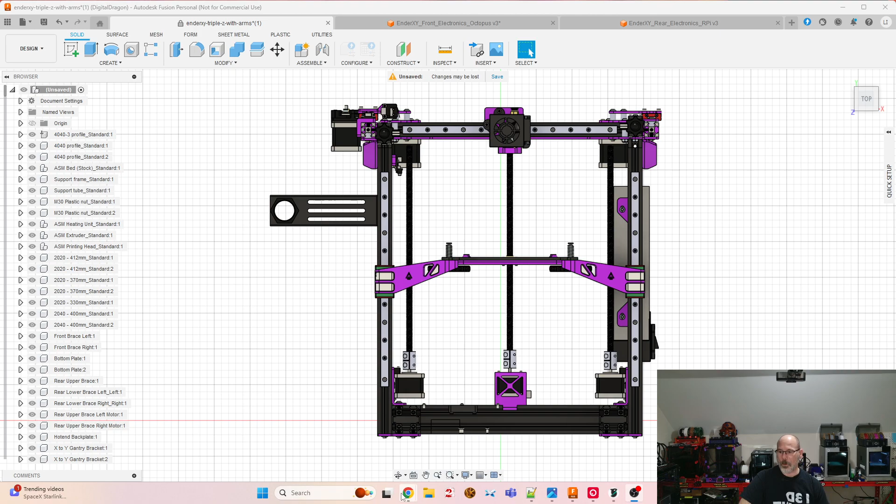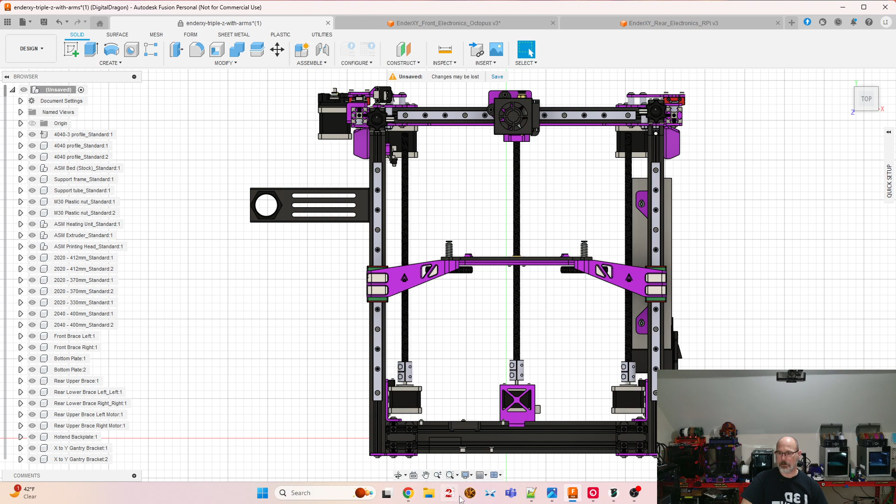So what we started doing was developing a box for the front that would hold the Big Tree Tech Octopus, right? So we did some measurements. We CADed this out.

We've got the mounting studs here for the Big Tree Tech Octopus, which is pretty nice because they're on a rectangle. It's not like one's offset or anything. And I decided to make a tunnel here, because remember...

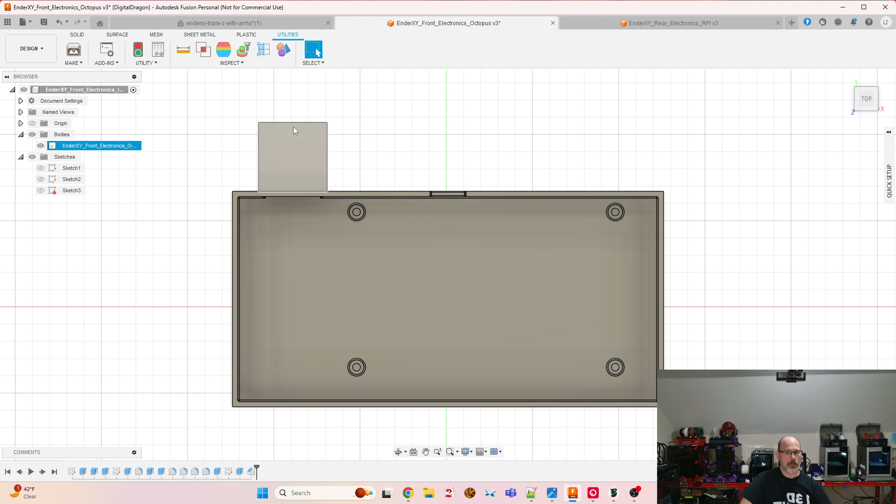On that crossbar of an Ender 3, it's got that cutout to allow the wires to come through. Normally what they do is just provide some wire wrap around the wires to protect it from that sharp cut they make on the CNC aluminum. So what I decided to do is make a full tunnel here, fully enclosed for this part. You'll understand why in a little bit.

And there's this other little cutout here, because once again we're using an Ender based frame, so that lines up with the cutout at the top of that 4040 cross member extrusion that would hold the Y rail. Now, we're not using the Y rail in this build, except we did, because we used that for the rear cross brace to mount the third lead screw.

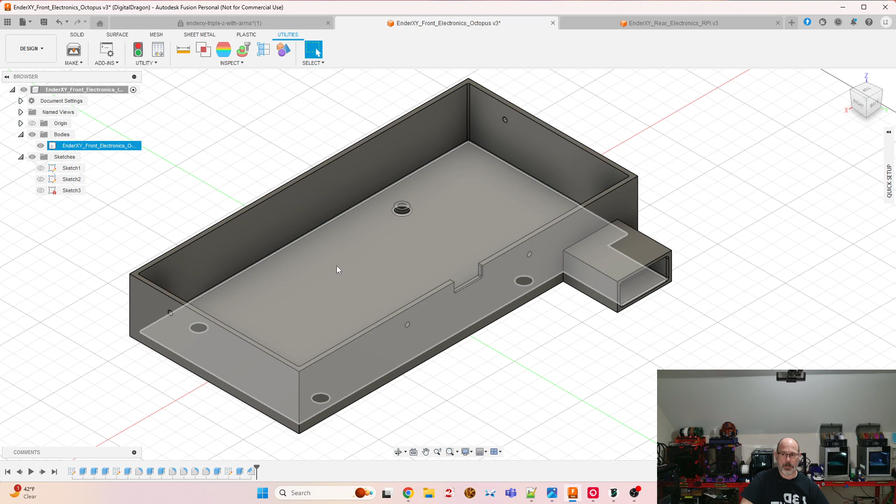So what I'm going to do is use this pass through to bring the power and the UART connection between the Octopus board and the rear of the printer, which is where I CAD-ed up this other piece that will hold the Raspberry Pi. So the Raspberry Pi is going to mount right here with its USB ports and stuff facing the sidewall.

And that's going to leave a lot of room here for other things. I haven't decided yet, but I may go ahead and put a fan outlet on here and just have a fan sucking air down, with a couple of cutouts in the top. Or what I may do is at the front, hang a fan...

from the top of the deck panel that's sucking air down in, and then add a fan out port in here that will suck air back out and exit down the back. Haven't quite decided. I may hang the other fan off the back of the deck panel. We'll see, I haven't quite decided how I want to do everything.

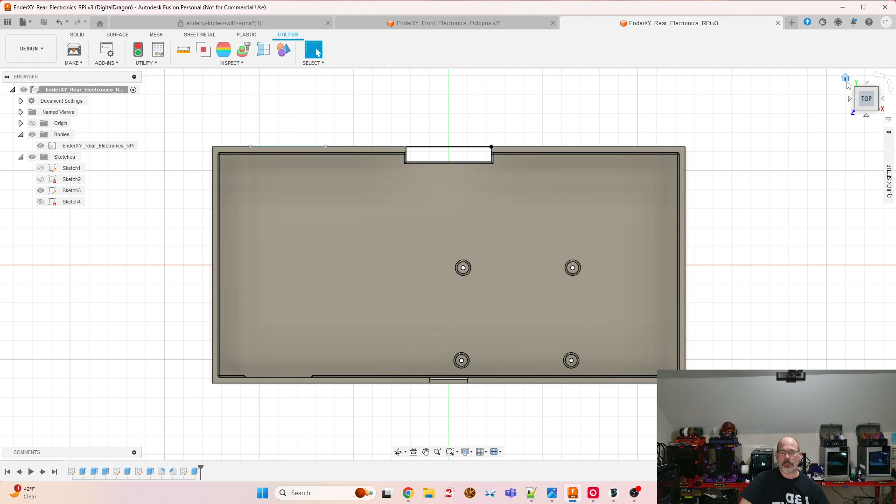But if I need to reprint this out, I'll reprint it out, it's not that big of a deal. But you'll notice that there's a large cutout back here. Well, that's to account for the motor mount in the back rear.

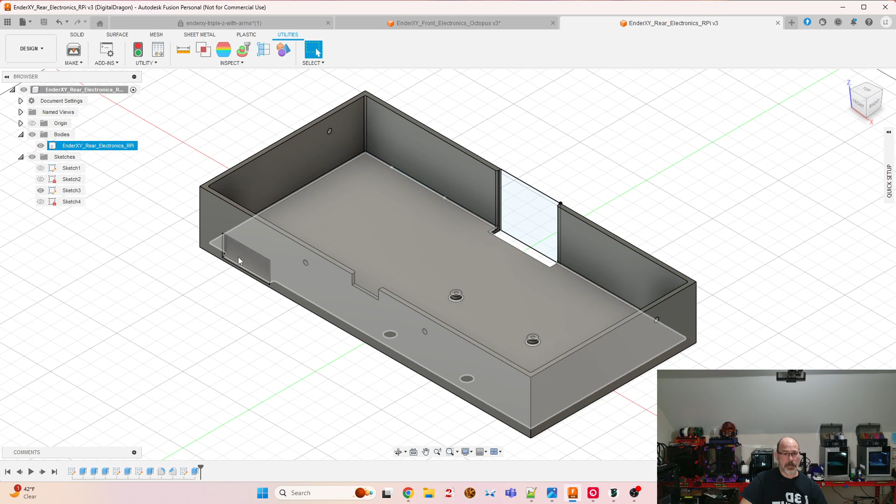Once again, we've got the cutout up top to allow for the cables to pass through up here, and a cutout at the bottom that lines up with the one coming from the other side. So I've got these printed out. I've test fitted and verified that the holes line up for the boards, but that's kind of where we're at.

So I just wanted to rehash what we did. Last stream, we CAD-ed this out and I printed it. We didn't stay on for the end of that print, but I did get that print done, and it fits. The hole spacing for our Octopus board works out exceptionally.

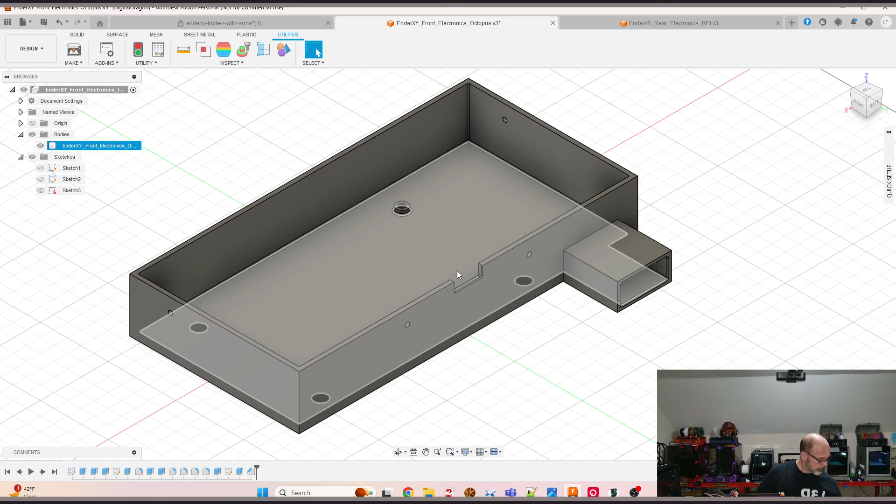Once again, here is that printed piece. This is just some bed adhesion stuff that I had on there, don't worry about that. Because this is a pretty large area, we did do some supports in here. And what I did when I popped those supports out is I just went and filed the top some, just to try and get any roughness from the support interface out of it.

But we've got this notch out here, we've got this tunnel, and we've got a hole on each side and two along the back that will allow us to use an M3 to attach it to the top of the 4040. And so if everything works out, we'll be able to take this and it would be able to slide straight in just like that.

And you're saying, well, why didn't you add flaps to the side? Well, I didn't add flaps because on a standard Ender, you're going to have a screen hanging off to one side or the other. So we have a screen that we can hang off of one side or the other, and there's plenty of mounts for those. God, there's mounts for those all day.

And then the other thing I can do is, because we have a cross member in the back, I took the plastic covers off the back, and we can just take these and pop them in, and that'll cover up that front cutout, and we'll be fine. I wanted that nice flat look.

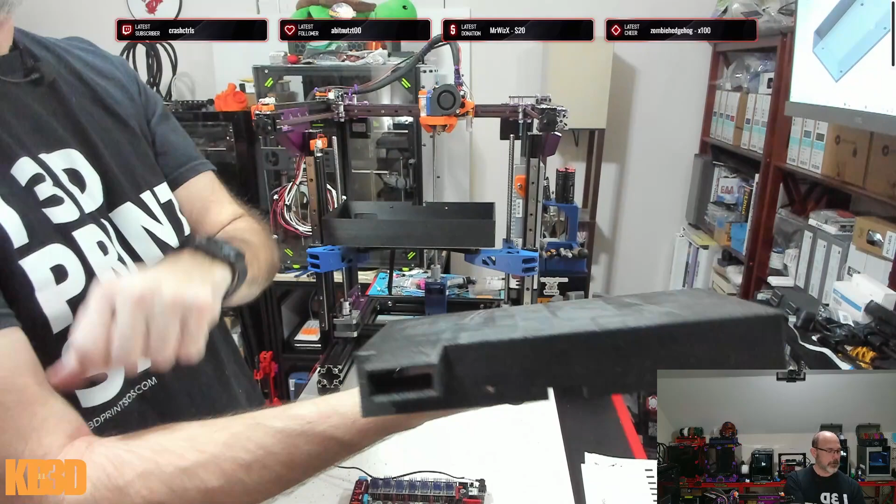I did go ahead and put heat sets in this because this is the one we're going to go with. Same thing, file down the inside here some, but same amount of dimensions. I just increased the offset for the walls to 3 millimeters, and that's going to fit right there perfectly. We still got our nice cutout here.

And then we CAD'd up the rear, and I said okay, let me print the rear. Started it, it was printing overnight, everything was going good. And I woke up in the morning to this, and it said it completed, which dumbfounded me because that's not 40 millimeters tall.

So we had a break in the filament, and then it cooked the filament in the hot end because it broke. Where it broke is between the bottom of the orbiter and the top of the tool head itself, there was some break somewhere in there. I was able to retract the filament, and I retracted about that much past where the gears had basically ground it down to nothing, so that was good. But it took me a while to clean out whatever had baked in there. I finally got it cleared out.

Everything was looking good, but the nice thing was there was enough detail in here that I could tell whether this was lining up. I could tell whether the holes here for the Raspberry Pi, or in this case I'm going to use a CB1 on a Pi 4 sled, so we'll roll like this because I have it, it's sitting here, it's ready to go.

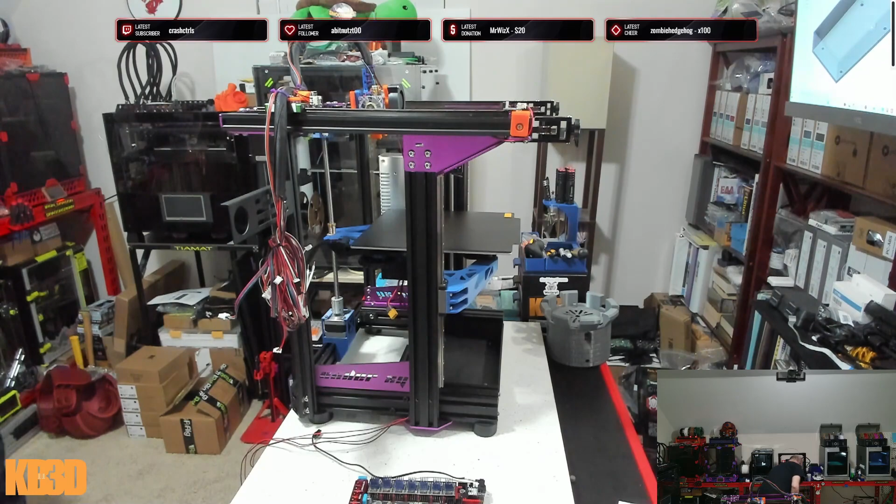I was like, huh, okay, because this piece here is, let me see if I can flip this around here. Crash, boom, bang. Let's sit that down there. What else did I send flying? Goes in there, that is a screw. Put that off to the side.

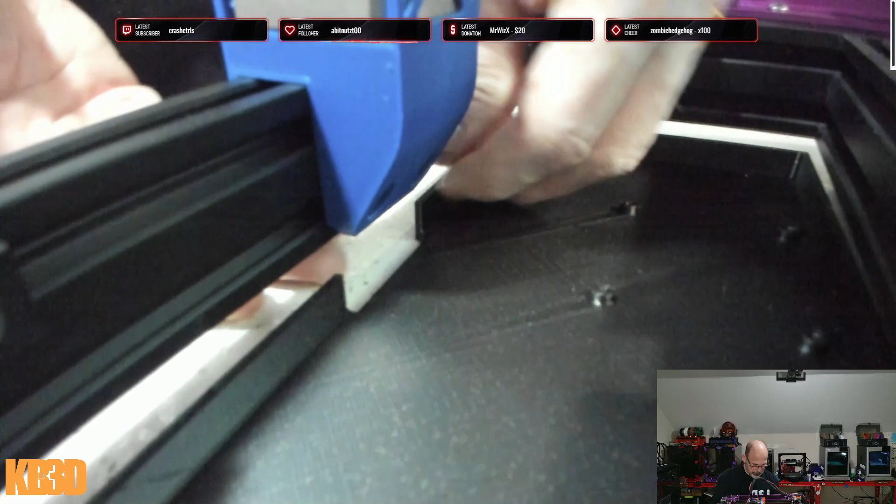This mount kind of slopes down, so what happens, let me see if I can get that sitting there. When I bring this around and go to lift it up in place, if I can. There we go, as I go to lift this up in place, it's catching on the edge there. So I need to make this a little bit, make the cut a little bit deeper. So I want to say this was 5 millimeters, so I made it 8 millimeters on the next rendition.

So what that looks like, see if I can get this lined up, is just a couple more millimeters of distance there that it's going to have. So that should clear it and be able to come up flush with the bottom of the printer.

And this is that new piece fully printed. So once again, this is going to line up with the center because it's spaced exactly the same. This cutout lines up with the other trough because it's cut out the exact same spot, just on the opposite side. And then this is cut out to go around our motor mount. The only difference is here I can put on M3 bolts with hammerhead T-nuts, slide the whole unit in and then tighten it down, where here I've got to lift it up in there and I'm going to have to pre-place some T-nuts and then come in and screw them in, right?

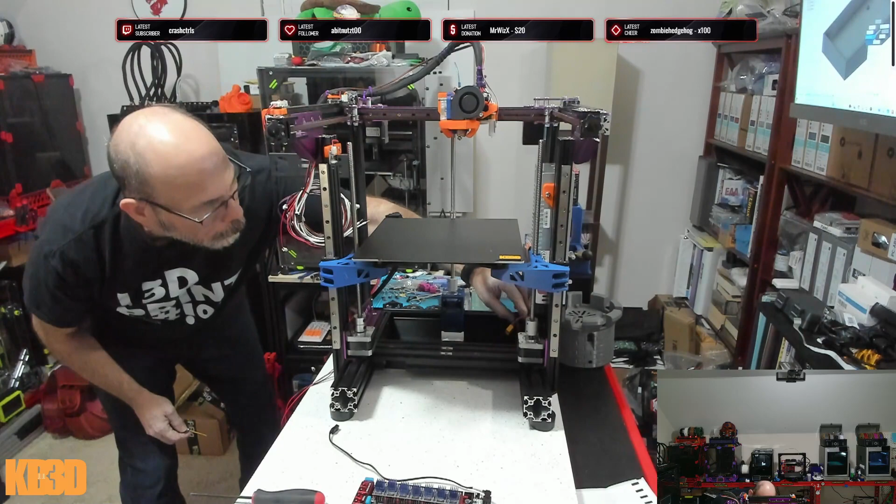The decision to use black on a black frame, because blacking everything out looks really cool, but god is it a pain in the butt when you're trying to line parts up.

Once again, I'm just trying to get them, I'll say 90% there, and then I'll come in and use some button head screws, if I can find my button heads. I'm going to be nice to myself and use the silver screws versus the black screws here.

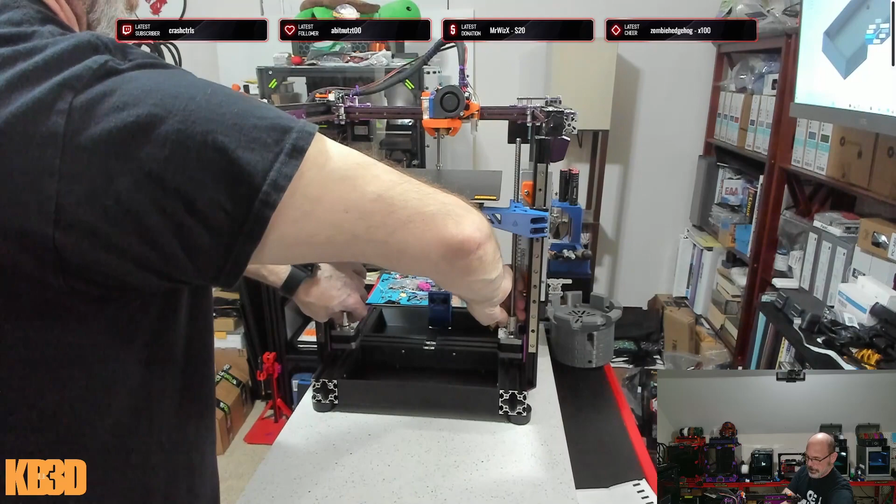Hey, Tech Cheaper, how's it going? I thought I saw somebody say, I think it was Free Heathen, that was watching the launch and said something about that they had to, for the, I think the bottom part of the rocket came back down, but the top blew up, or they were splashing down. It wasn't a fully successful. Booster lost comms. Yeah, there you go.

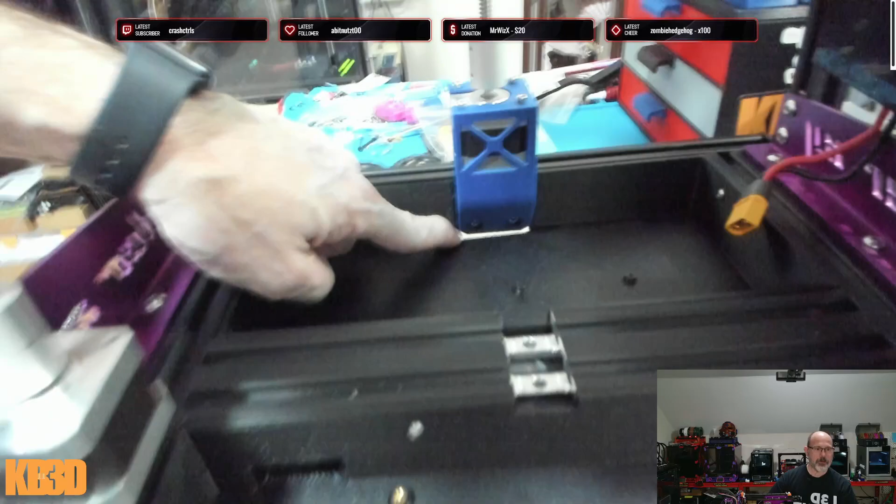So yeah, once again, this is what we're left with. We've got a nice box here at the front, it's all nice and flush with the top and the bottom. We've got our box in the back, we've got a little bit of an air gap there, which is perfectly fine, right? A little bit of air gap is perfectly fine. Mounting spot for our Raspberry Pi in the back, and mounting studs for our Octopus.

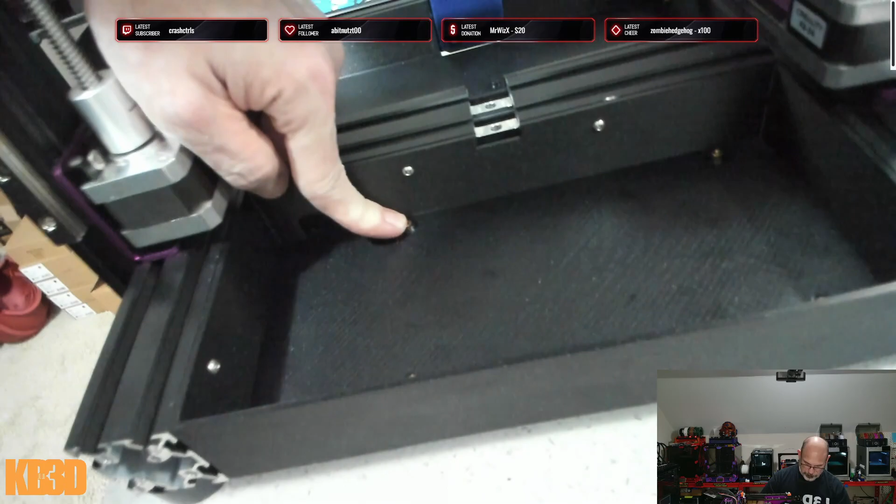And I did go ahead and do these heat sets earlier. So let me bring this a little bit closer.

And we're going to mount our Octopus. Because of the way things mount, I'm going to put all of my motors at the back, because I've got pieces that are going to stick out on this end, and this end is going to have all of the power to it. So I want to be able to cleanly bring my power down, route it through the loop, and then right in.

And remember, this has a powered bed to it, so we have to have motor power, board power, bed power. So these are 3 inputs, and then a single bed connection that comes out that connects to this.

So when we go to do that, I'm going to bring in the standard power from the Ender, and I'll probably get rid of this and just run my own power in. Then somewhere in here I will break it out into Wagos, and we'll just bring in 3 lines because I don't want to daisy chain these. So I want 3 distinct lines for this, and then we'll bring them down into Wagos and divvy them out.

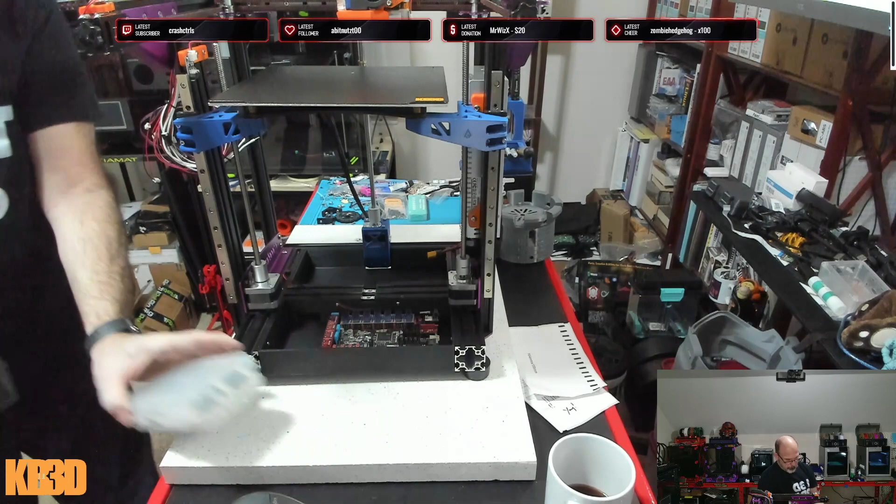So I want to say that I do have M3 by 5s or M3 by 4s somewhere. Give me 1 second to take a look. I had them for a very specific reason. Maybe not those. Not there. At least I thought I had some. Might have to circle back on those as well. That's not going to play. 3x4s.

I think these M3x4s are countersunk, which technically would still work.

Countersunk screws technically will work here. Make sure you don't crank them all the way down.

Hey, Royal Nomi, how's it going?

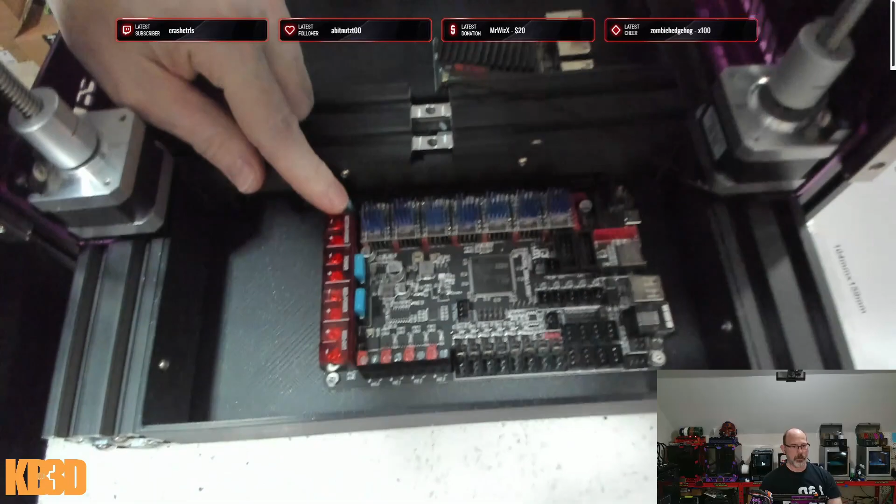Guys, so here's our Octopus board all wired in. And once again, it's pretty close to the edge here, and I did that for a reason, because we have to put some wires into these screw-down terminals. So I wanted as much room as possible up here at front without extending past the front. And then same thing over here - I originally designed it with it flipped the other way.

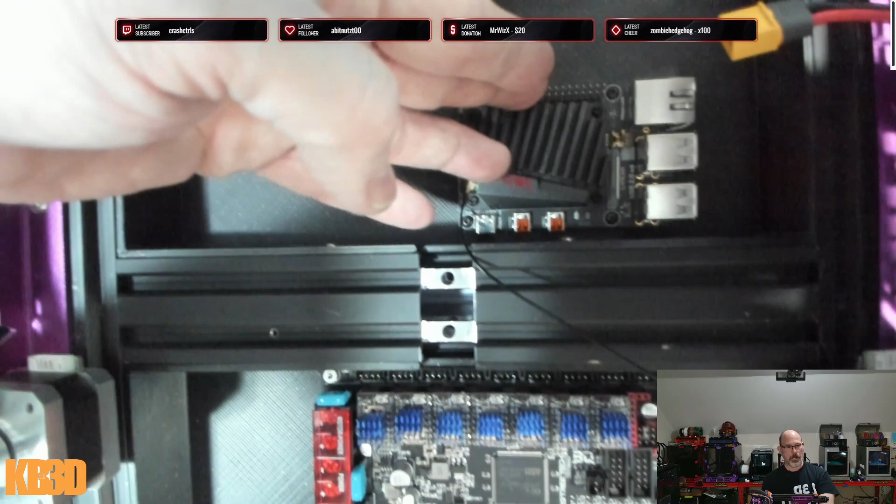If I was doing that, I could have moved it further over, but I didn't. These are offset, so they're here and here. If I had them flipped around, the board would be coming out this far. I could flip it around to get everything back there, but that puts these right up against the edge of the board. But that's fine.

That'll work. I don't really need access to any of the ports there anyhow, because those ports are the 5-volt power and the two HDMI ports, and I don't need either one of those. So it's fine that they're blocked off to the side there.

We'll be coming from right here, around through this top channel, and then straight over to do the UART connection, so that'll be an easy cable. Then everything else is going to go through the tunnel here: the 3 power inlets, the bed out, our motors, and our end stops and what have you. So everything else is going to pass through the channel here.

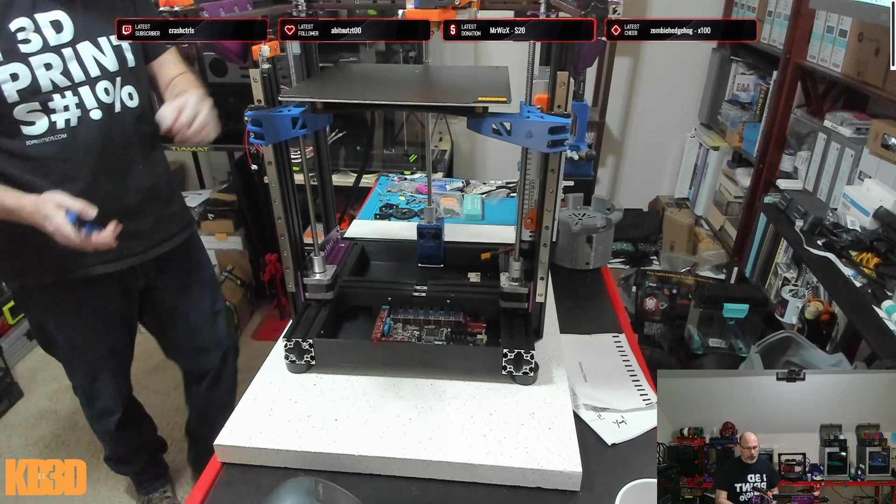I'm not sure if I'm going to do that stuff on stream, because that's going to be a lot of wiring. What we did in the past to get this started was use a lot of the EnderXY basic wiring, because it had extension cables and stuff like that. It was a good way to just get started and test fit things. But now I'm really going to have to get down in here, and if I'm going to extend a cable, I want to extend it once. I don't want 2 or 3 extensions and connectors in a cable - just one connector.

Once again, we've got currently the X end stop, if I can get it untangled from here. This is our X end stop, and it's mounted on the side of the gantry, which is great, except this is going back and forth. If we're coming off to the side like we had it, that works perfectly fine, because we had it coming over, joined it into the cables, and that works great.

But with having this piece in the back, what we're going to do now is bring this down the back and basically do the standard umbilical, where we come down along the back side. We'll hook it up somewhere here, come right down the back side, go underneath the back cover, through the front, and everything gets plugged in, including our BL Touch - the whole 9 yards.

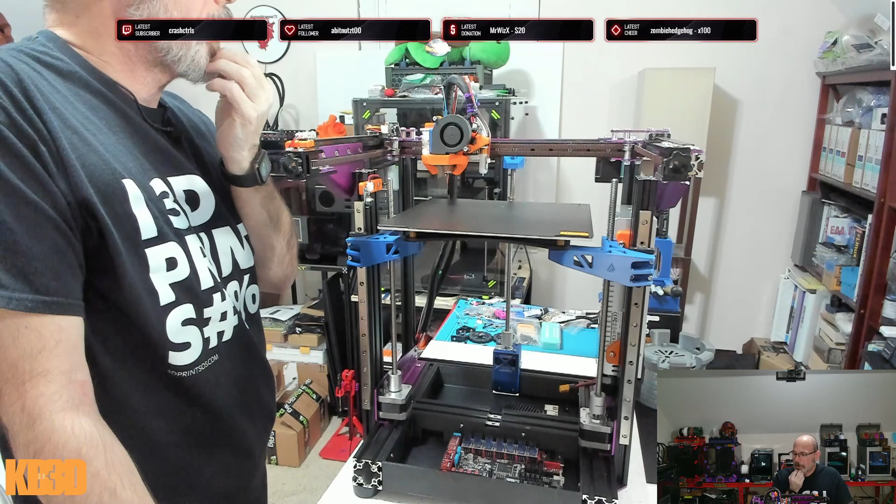Like I said, it would probably be easier just to take this board and mount it to the backside of this piece, because once again, I went off the books for this build. This is not a standard EnderXY build either, because normally you would use a standard Ender 3 tool head, which I didn't want to do. So I paid for the upgrade.

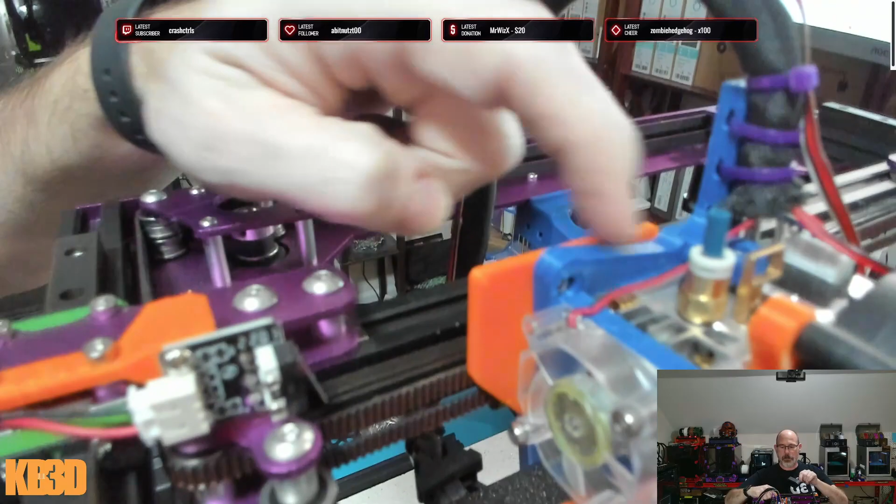So I did two things. One, I got the upgraded hot end, which is an H2 hot end. Then I went even further and put an H2V2S Lite on here, which is an even smaller version of the H2 hot end. Because of that, I could not use the CNC mount that came with it, so I had to CAD up and fabricate my own, which I did here. There was a standard CNC mount you could get for this extruder - I got that, but I had to 3D print this mount instead.

So what I need to do is see if I can take this end stop, flip it 180 degrees, and mount it to the back here. If I can, great. If I can't, we'll just say I can't, because I should be able to unscrew this top and bottom, mount it right here with some lock nuts on this side so it's squished through, and then it's going to start triggering on this versus being mounted on this - it would trigger against this. That should enable me to do that. If I have to, I'll make this a little bit longer, but I think that's doable.

Oh, Free Heathen, how about this? So we designed this, we CADed this on the last stream. It's flush with the front on both sides.

It holds our BTT Octopus board, which we're going to need after adding our third lead screw. So we got this laid out, it's a 250 by 125 box. That's pretty easy, we laid in the cutout up here, and down here we made a full tunnel, a 40-40 tunnel that leads through here.

Then we had to do the same thing back here. As you can see, we made a cutout to go around this mount, and we set up for a Raspberry Pi. Now this is threaded directly into the board or into the plastic, where this is using heat set inserts. It's got a cutout that lines up with the trough that we did from the front case, so we have a fully protected tunnel for our wires.

We've got 4 M3 screws that hold this plate in. And whatever wires I put here, I'll wrap up with some electrical tape or maybe some heat shrink to protect it.

And then the plan, let me bring you guys back around here. The plan will be to cut a sheet of 3mm ABS that just slides right across the top, and I'll have a cutout here, and that cutout's going to be sized a little bit larger so that all of our wires, I can get all of my wires, will come down this umbilical straight down through the front cover right here and be able to route around and go in nicely.

Now the big thing is I don't know if I'm going to use all of this wire here, because you'll see there's various connectors already. And that's because a lot of these wires I took off of and reused from the Ender 5.

So I need to take this wire and get it in the wiring loom and some other stuff. I'm going to have to think my way through that. I don't know if I'll think my way through that on stream or not, because that can hurt for both me and you all.

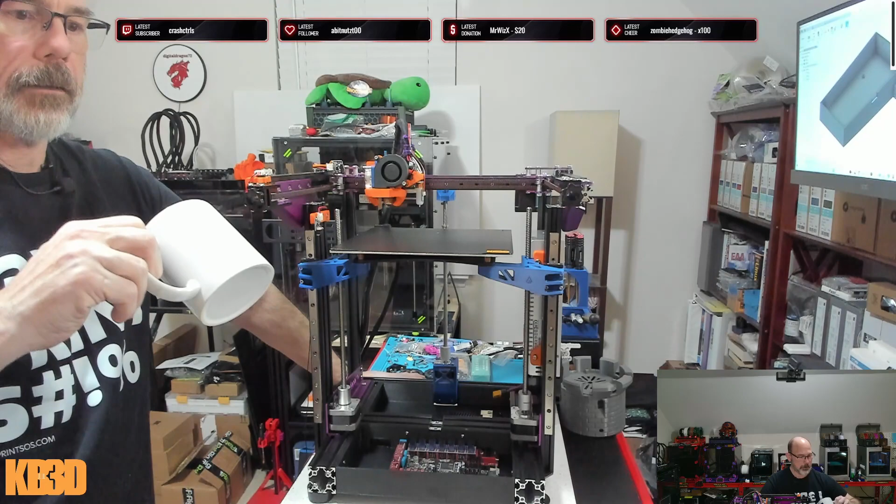Have you seen the pug umbilical on Printables? Would be perfect for keeping track of those wires in the back. I have not, let me pull that up.

Free Heathen, I know you like your Tinkercad and stuff, but we went full Fusion 360 here for the back box and the front box. I'm going to export them as step files and put them up on Printables, adding them to the collection that's already out there.

God, that's a long motor wire.

We're gonna be working on this stuff, trying to get this wired up. I have to think through the X here, but if I need to CAD up some other parts, I'll CAD them up and get this stuff put up. But yeah, this worked out really well.

This was another design that somebody did, which looks really good. It mounts the power supply in the front and uses the standard Raspberry Pi, and if you're using your standard Big Tree Tech SKR Mini E3 V3 board, that would work as well. But adding that third motor in the back negates the ability to use that.

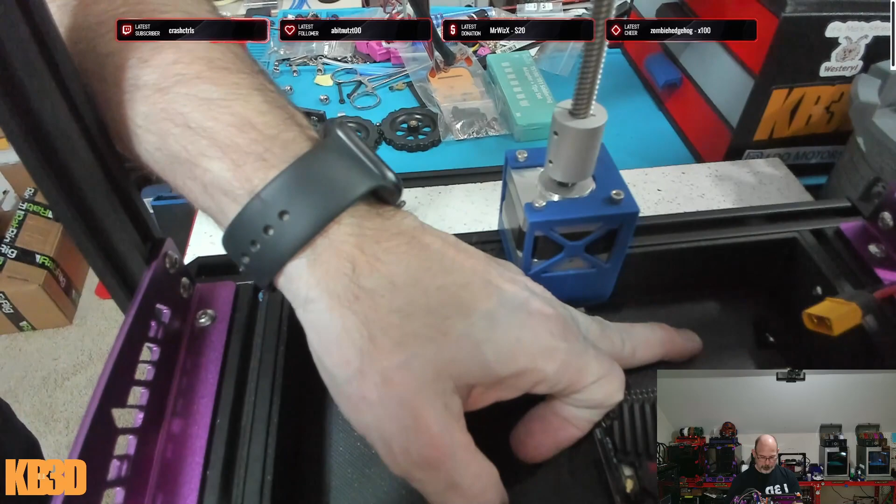I was working on trying to add some fans here. That's not going to work because of course there's no way for a fan to pull from there. So I have room to put a fan in the bottom over here, and room to put a fan right here. But I need to get some cooling over this area - this is going to heat up more than that.

So what I was thinking about was how I'm running my wires, and I can potentially put a fan on the underside of the top plate right here, and I'd put some type of covering - even if it's just nylon from a pair of pantyhose or stockings - to cover that fan so nothing can fall into the blades. Stretch some nylon, glue it around and mount up a fan as an intake here, blowing out of the bottom either here or over here in the back corner, and that will provide airflow through this channel and the one between the two.

So that would allow me to add ventilation a little bit better. I could do the same type of thing on the deck panel, but I don't think I'll be able to do that without doing two separate deck panel halves, and I don't really want that. I think having one deck panel would be fine. Well, maybe that won't work either because of the way this would have to slide in underneath the motors - it's going to have to be slid straight in.

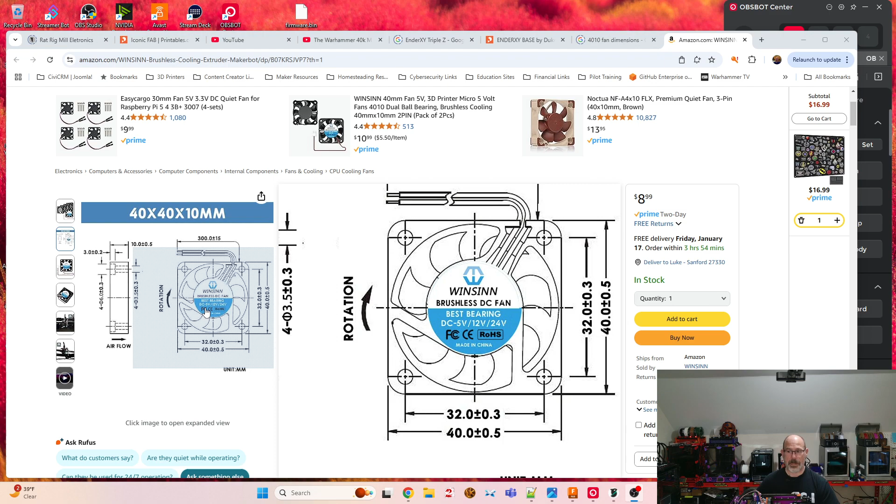Have I been thinking about it? Well, I was over here looking at measurements, and I did CAD up spots for this, and then I took them back out of the sketch. I'm still thinking about it.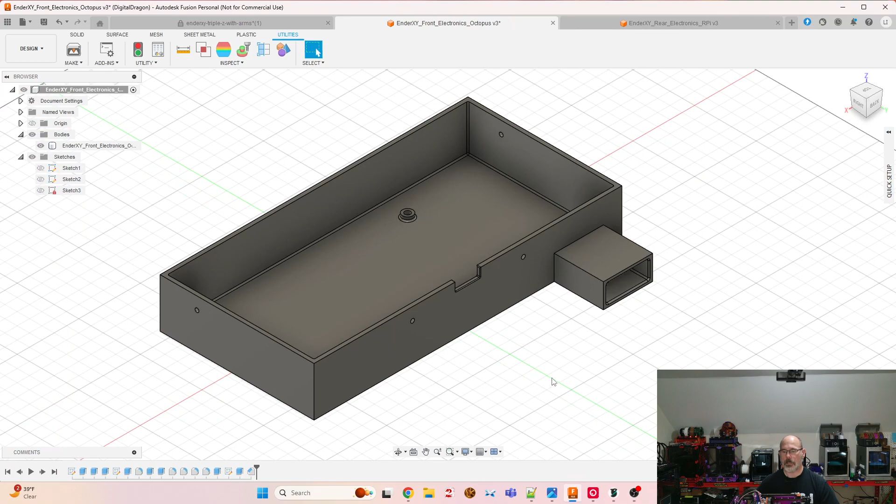Yeah, that's kind of where we're at, what we've been working on. I do need to work on the wiring, and I need to think my way through it and figure out what cables I'm going to use—if I'm going to use the cables I have, or redo something, which ones I need to extend, and which ones I'll just cut and go with.

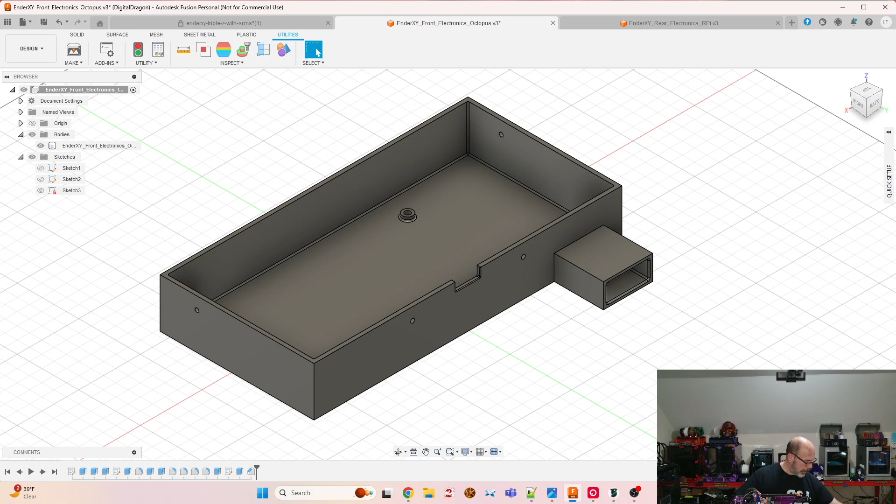The wires for the bed—once again, let me do the overhead here. I think what I'm going to do on the bed is mount something here, or underneath, but on this printed part here I'm going to mount a set of Wagos so that the bed wire goes straight to the Wagos for both the power and the thermistor. And then we'll come from that and go right into the umbilical.

Actually, we wouldn't be able to go into the umbilical there. Might just have a separate umbilical that comes out, but it'll be easier that way since I'm going to have to extend or do something with these wires regardless. I think having them come up to the bed with basically a quick disconnect system here, so we can take the bed on and off if we have to do work on it, would be more of a quality of life thing.

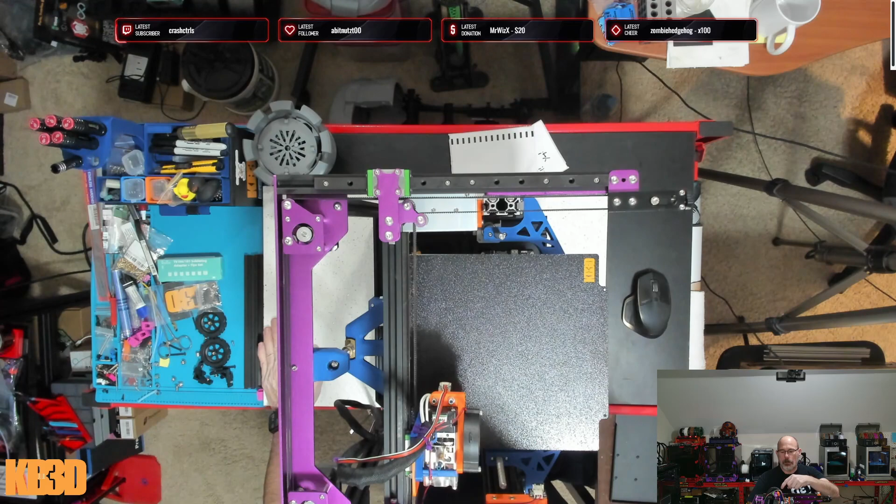And then, like I said, I need to figure out something for the mounting of the end stop and triggering of the end stop over here. I think we should be able to do it—basically just disconnect it from here, mount the two holes here, and still have it trigger up against this existing stop, which is just off the screen. Let's not break the printer, Luke.

So yeah, I think we're close. It's just me and my brain—I've got to think through a couple of things. These wires, I think I'm just going to wind up extending and running up, making them longer, so they come down around the bottom, pop back up, and go down through the back here with the rest of the umbilical, that way they're out of the way. Right now they come down, loop across, and run down this upright.

I guess technically, rather than bringing them down this one, I can continue to run them along the back, drop them down this back upright, and bring them around. Might do that. But anyhow, that's kind of where I'm at.

I didn't want to get into wiring today. I've been enjoying talking about this process and the thought process and how we're doing this, 'cause that's kind of fun, believe it or not. It allows me to geek out some.